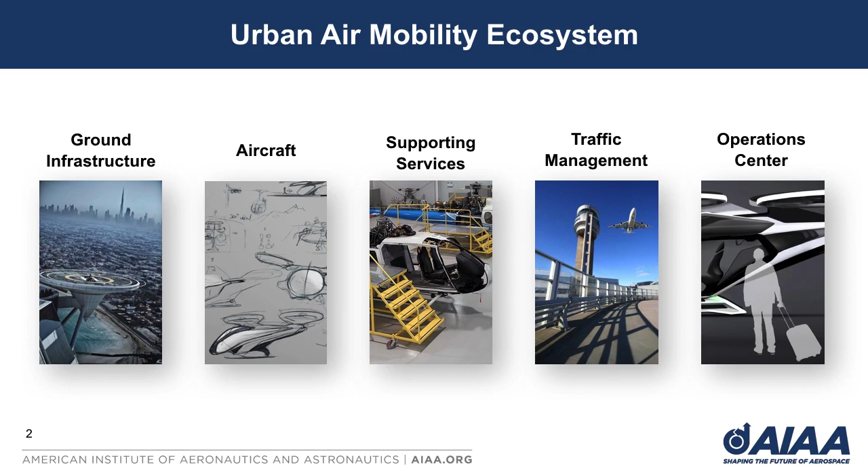The supporting services, which help maintain a high level of vehicle reliability and safety. The traffic management system, responsible for coordinating and enforcing safe airspace usage. And the operations center, responsible for efficient day-to-day operations. We refer to this complex system of systems as the UAM ecosystem. From an engineering perspective, an ecosystem-level view of UAM complicates design significantly.

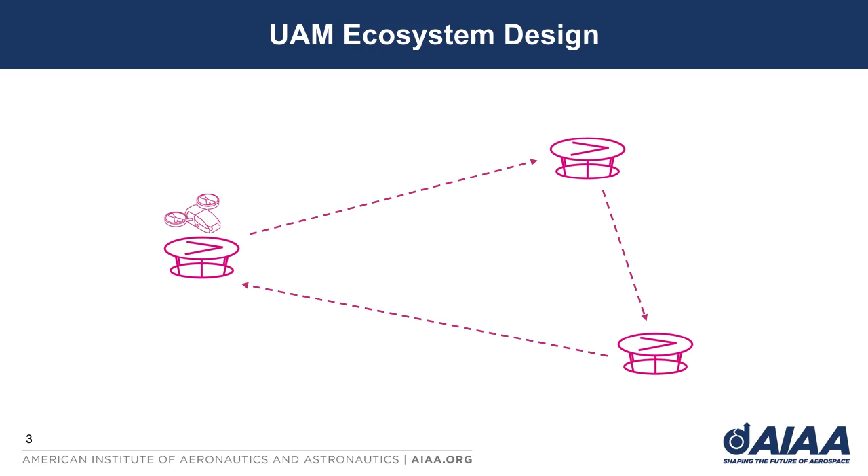Consider this example. Say we have a simple network of vertiports that are connected by a set of routes UAM vehicles can fly. We have a UAM operation that is ready for takeoff. We may have an operations center that manages what the operations in the network do, and maybe even other vehicles in transit. Now, at the time of our operation, which design choices become more important for things to run safely

and efficiently? Is it how the underlying vertiport infrastructure was designed, its location, recharge capability, and capacity? Or is it the fleet management policy that the ops center is following? Or is it some other design choice driving the performance of the system at this stage?

Well, consider this. Both the vertiport infrastructure and the fleet management policy are important for a performant UAM ecosystem. But we must note that designing and building the vertiport infrastructure takes a tremendous amount of time, likely on the order of years. While the fleet management policy, on the other hand, can be changed just prior to takeoff. This is exactly the problem of UAM ecosystem design.

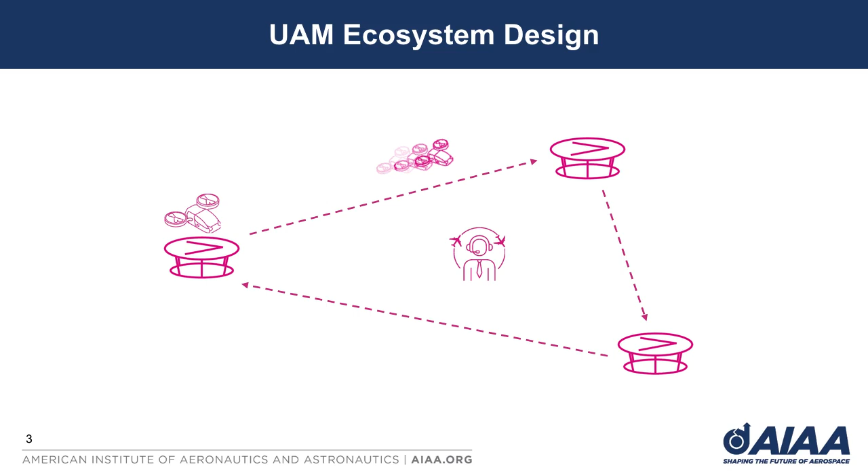We're analyzing and trying to make choices about interconnected systems and design variables that were built on different timescales, interacting with one another. In fact, the performance of such a complex ecosystem can be very difficult to evaluate before it becomes operational. However, in the age of UAM, we have computational tools to answer some of these complex questions. Simulation can help, and we leverage it extensively in this work.

To help us navigate the complex UAM design space, we introduce a simple formalism that helps group different design choices or design variables together. We define three categories of variables that are based on the time horizon between the operational readiness of the ecosystem and when the design decision needs to be made. We call the first category long-term strategic, or simply long-term. The design variables that fall into this category are typically related to infrastructure and UAM network design, vertiport placement, and vertiport constraints. The design variables in this category may need to be chosen years in advance of a UAM operation.

We call the second category short-term strategic, or simply medium-term. The variables in this category are related to UAM route design, vehicle capabilities, and fleet size. Medium-term design variables may need to be chosen months to years in advance. The last category refers to tactical or short-term design variables. It encompasses choices related to fleet management or traffic management and inter-operator coordination. Variables in this category can be chosen hours or even minutes prior to the start of an operation.

It is the choice of all the design variables together that ultimately guide how the UAM ecosystem performs. In this paper, we aim to analyze how the design choices in each of these categories are related to one another, and which are the most critical to a performant system.

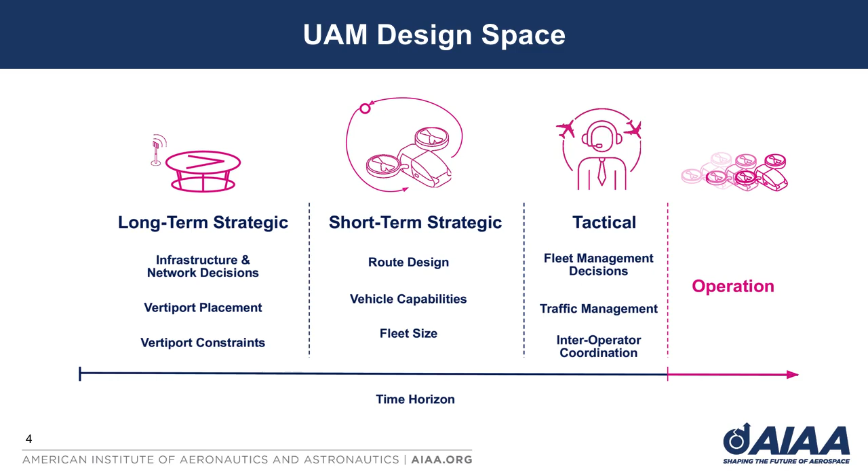Building on this, we highlight two primary objectives for this work. The first is to evaluate the impact of UAM design variables on performance of the UAM ecosystem. Specifically, we use simulation to analyze how design variables from the long-term strategic, short-term strategic, and tactical categories each impact performance metrics like throughput, delay, and utilization. The second objective is to provide ecosystem design guidelines and recommendations. We do this in two ways.

The first is through a structured framework that relates design variables to one another, either through the long, medium, and short-term categories described earlier, or by characterizing simple relationships between design variables as a means of estimating bounds on how they impact system performance. The second way in which we provide guidelines is by leveraging numerical optimization techniques in tandem with simulation to extract design variable sensitivities. This allows us to identify robustness in our design choices and to ultimately extract critical information about regions in design space that are more sensitive or more robust to change.

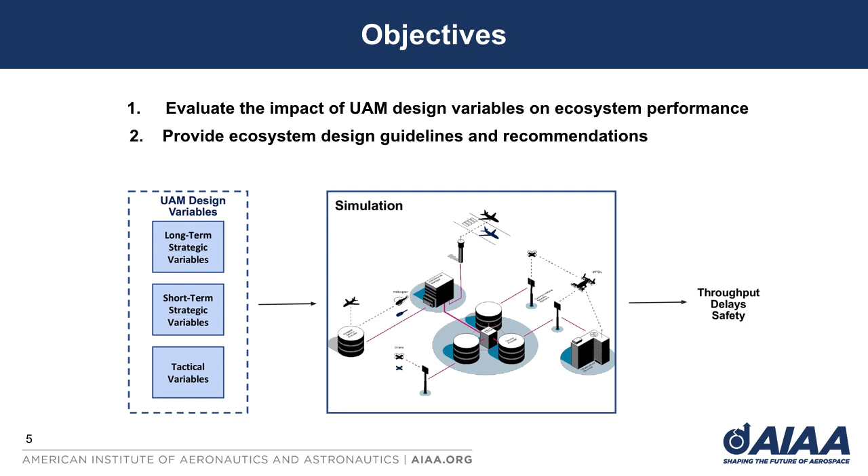I'd like to discuss the exact UAM design variables we analyze in this work. We consider a design variable from each of the long-term, medium-term, and short-term categories. We note that a number of critical UAM design variables are not covered here, and we leave their analysis for future work. In the long-term strategic category, we analyze vertiport capacity.

Specifically, we look at the capacity of a vertiport to accommodate an idling vehicle and to provide necessary maintenance on a flight-by-flight basis, such as battery recharging or swapping. We capture this design variable by a quantity we call normalized vertiport capacity. This value is represented by a ratio of the total vertiport capacity in the ecosystem to the total fleet size.

In the short-term strategic category, we consider the fleet size serving the ecosystem. This is simply the total number of available UAM vehicles that can be utilized during operation. In the tactical category, we look at the fleet management policy used by an operator. Specifically, we consider an on-demand policy which responds to operation requests in real time, an on-demand policy with rebalancing, which additionally rebalances the fleet geographically in order to better accommodate demand.

And lastly, we consider a fixed schedule policy, which uses a pre-computed optimized schedule based on anticipated demand profiles. Each of the policies is implemented algorithmically in this work. We discuss the details of each policy in our paper, but leave those out here in the interest of time.

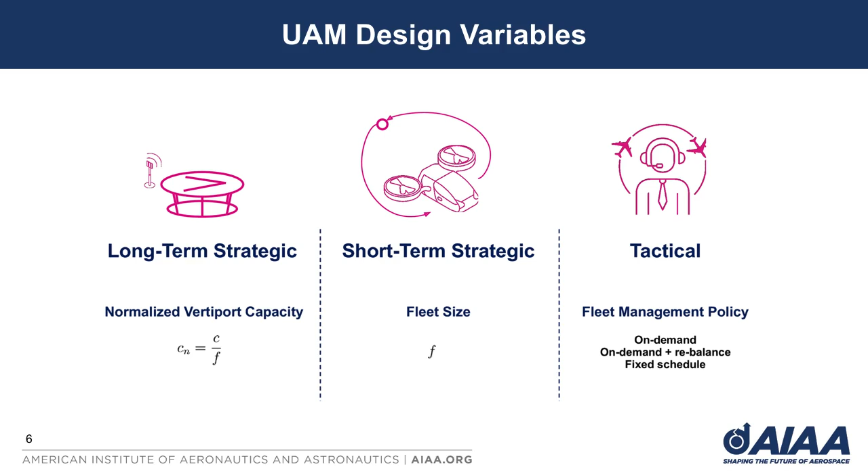Before diving into our experiments, I want to briefly touch on the approach we took in our analyses. Specifically, I want to point out two critical concepts. The first is our simplified surrogate model that estimates demand for a given vertiport and UAM network configuration along with the fleet size serving it. We use the vertiport capacity variable and the UAM network configuration to estimate a rough bound on end-to-end time for an operation. This time spans from operation start to being ready to fly again. We refer to it as T operation.

We combine this variable with the fleet size F to come up with a maximum demand bound the fleet and vertiport network design can accommodate, assuming the fleet is being fully utilized with absolutely no disruptions or wasted time. This bound is denoted by d hat max in our expressions. While it provides only an upper bound, we leverage it in our design and analysis frequently.

This bound can also be considered as a rough estimate of the capacity of a UAM network and fleet in the ecosystem, beyond which the system will have exponential drops in performance. An effective fleet management policy should see maximum operational throughput approach this bound.

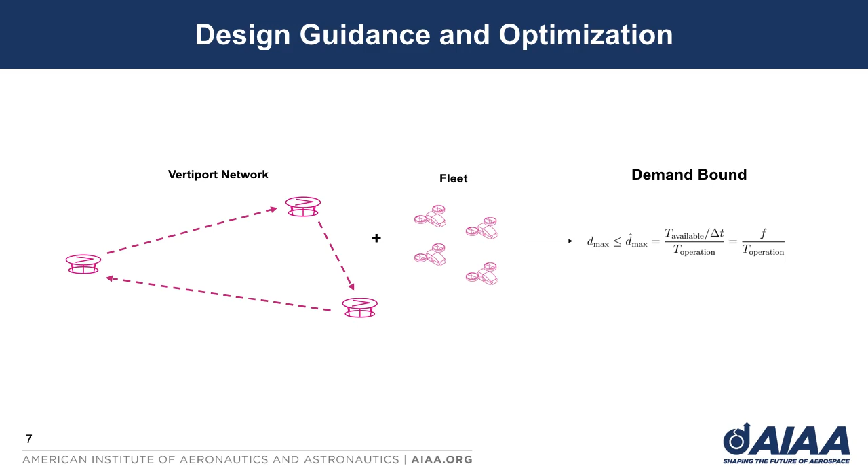The second concept is related to ecosystem optimization. In our analysis, we optimize a cost function J, which is typically a weighted sum of the performance metrics in our ecosystem, such as delay, throughput, and utilization, with respect to three design variables we consider in this work: vertiport capacity Cn, fleet size F, and fleet management policy pi.

Our cost also depends on a number of other properties of the UAM ecosystem, which we consider parameters rather than variables here, such as the vertiport configuration V, the network configuration N, and the demand D. By evaluating this cost function through simulation, we can determine which regions in the design space of our three variables impact ecosystem performance the most. In the next part of the presentation, Sheng will cover our approach to simulation, the results of our work, and the conclusion.

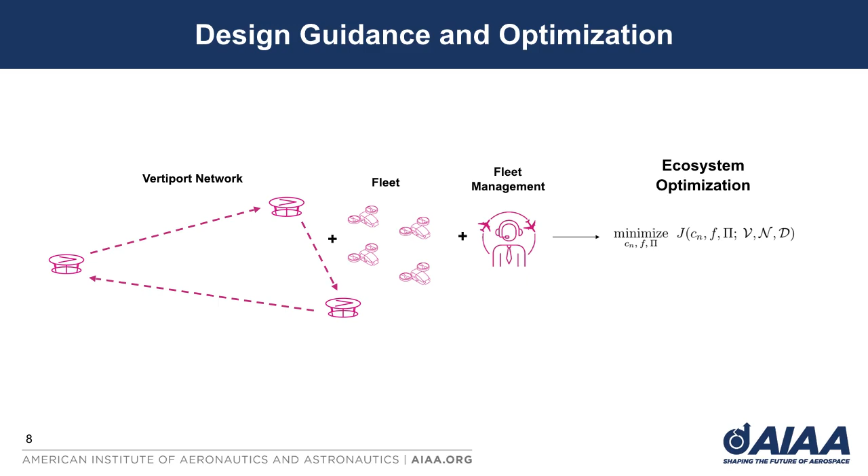Hello everyone, my name is Shane. I'm going to cover simulation modeling, results, and conclusion.

We use an event-driven simulator in this work. This simulator models high-level operational states a vehicle might find itself in under a nominal operational profile such as takeoff, landing, and maintenance. Our simulation doesn't consider the physics model at every time step. Instead, it abstracts the dynamics of each process into time durations, allowing us to efficiently evaluate the impact of UAM ecosystem design variables.

We represent each entity using a probabilistic model known as a Markov process, where each transition between states and the time duration spanning each state are governed by a probabilistic model. Starting from the ready state, an aircraft idles for delta-t idling until receiving an operation request.

An operation request is generated by sampling a random distribution, and it is passed into the model through an operation center. Then the aircraft enters the departure state, holding for delta-t ground holding until a departure fix is available. Then it takes off and flies towards the destination vertiport.

Upon arrival at destination, the aircraft is held airborne for delta-t air holding until a landing space and an approach fix are available, at which point it lands. After spending delta-t turnaround for turnaround procedures, the aircraft will be in the ready state again.

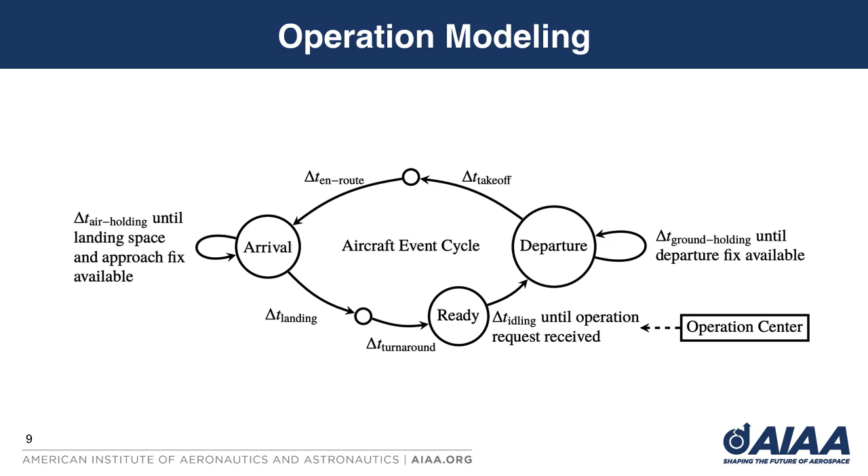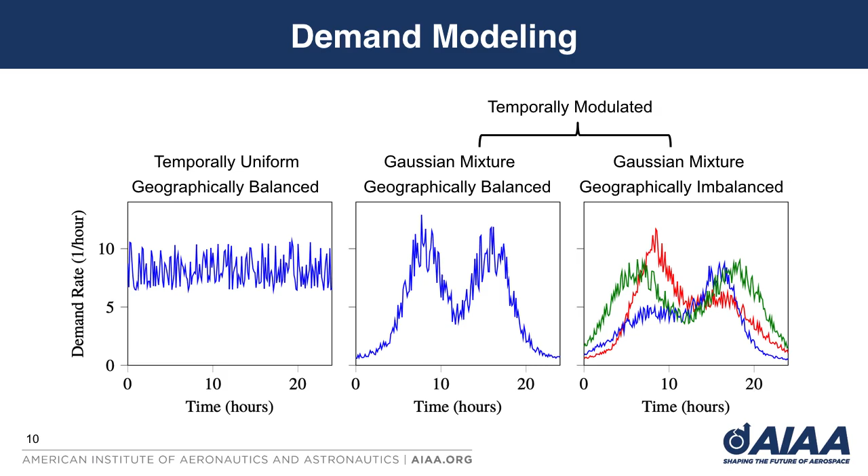A more realistic model uses a time-dependent demand rate. Using a Gaussian mixture model, we can emulate peaks and lows in demand for UAM operations, as shown in the center figure. By shifting the center and height of peaks in a Gaussian mixture, we can create geographically imbalanced demand rates for different vertiports that emulate rush hours to and from city centers. The figure on the right shows an example of such a scenario, where the demand from a specific vertiport is shown in different colors.

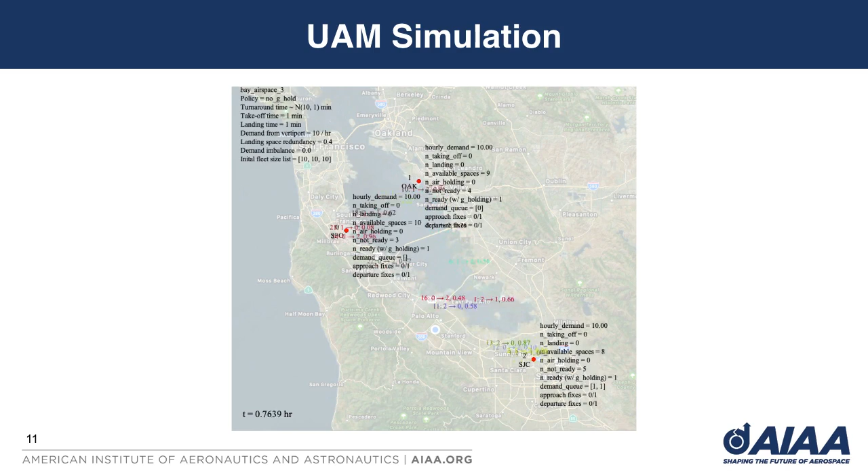Our first analysis examines a UAM network in the San Francisco Bay Area. We assume an aircraft cruise speed of 140 km per hour and the time durations mentioned in the previous slides. We use a fleet size of 36 and analyze how the other two design variables, vertiport capacity and fleet management policy, impact delays and time utilization as we vary demand rates.

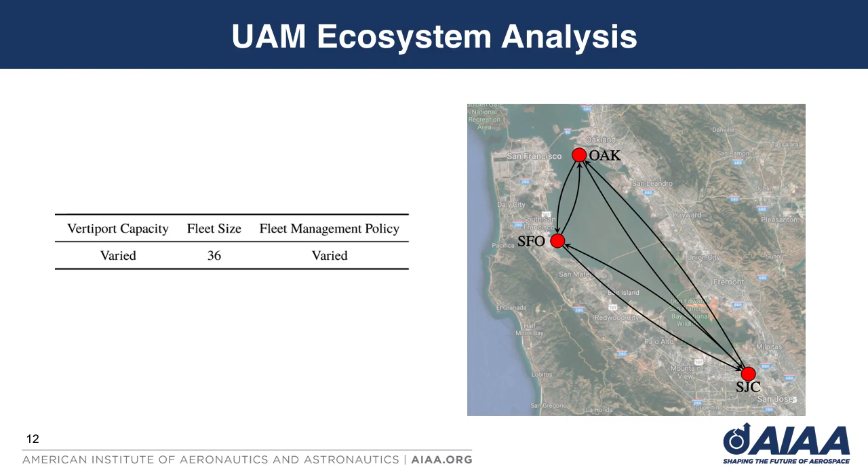Third, we observe an increase in delays at lower demand rates for fixed schedule policies. This occurs due to the sparse nature of operation requests at low rate. This is similar to how one may experience long wait times when waiting for a bus in a rural area, where buses run at low frequencies because of the low demand.

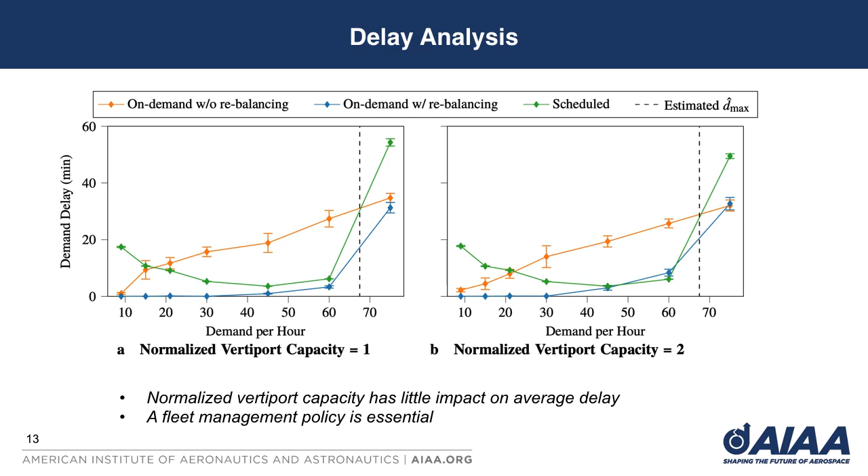Note the location of our estimated maximum demand bound in the figure, which is 67.5 operations per hour, according to the ecosystem configuration. We see delays for all three management policies increase rapidly after demand passes this value.

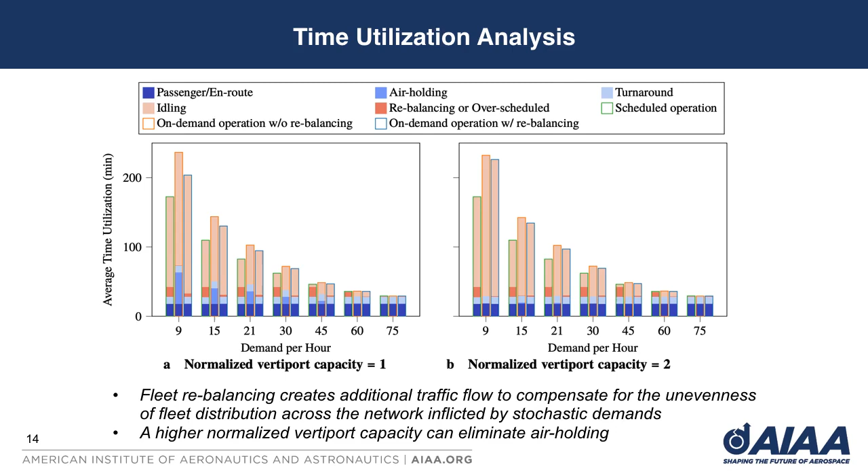to 2 hours. We observe that normalized vertiport capacity has little impact on net average delay and the overall throughput of the system. Additionally, the average throughput begins to flatten beyond around 75 operation requests per hour for all of these fleet management policies, which coincides with the estimated feasible demand capacity bound.

However, the delay performance differs drastically between fleet management policies. Specifically, we observe increasing system-wide delays as the management policy changes from rebalancing to non-rebalancing to scheduled operation. Results of the Gaussian mixture demand model are similar to the results of the uniform demand model. They can be found in our paper.

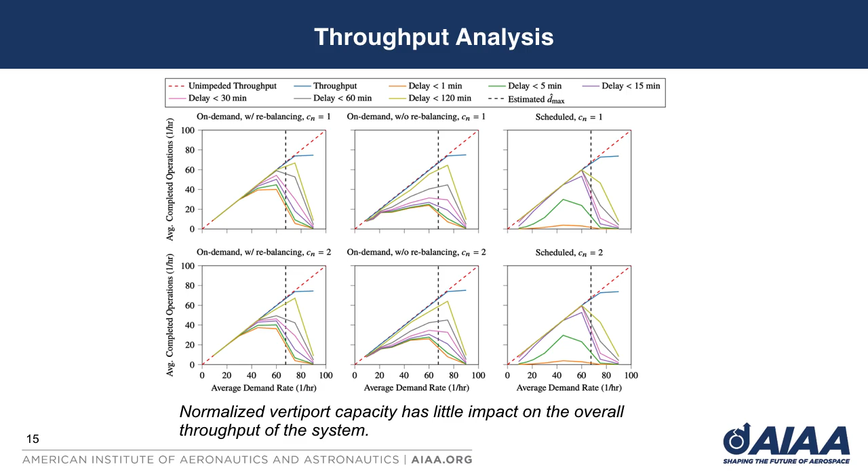We now examine the results of our optimization analysis, which uses the performance cost J introduced earlier. Recall that J is a weighted sum of the performance metrics of our ecosystem. Please refer to our paper for the exact details on how J is formulated. In this analysis, we optimized the cost with respect to a short-term strategic design variable, which is the fleet size F, and a long-term strategic variable, which is the normalized vertiport capacity c_n.

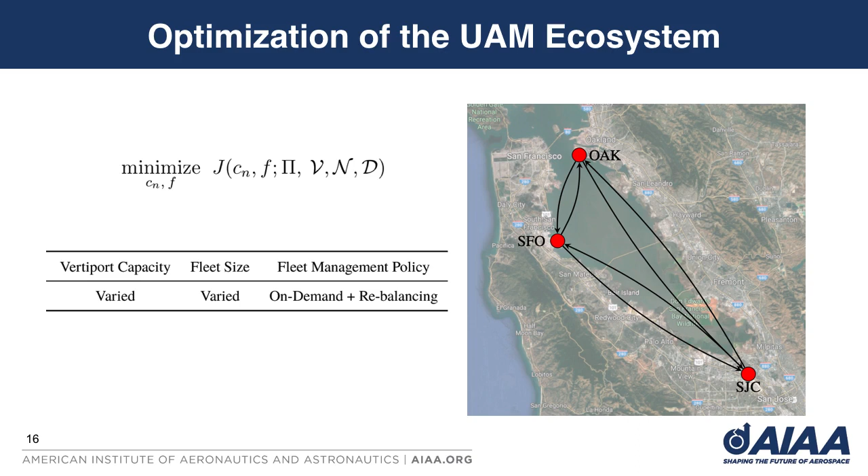The tactical design variable, fleet management policy pi, is fixed to on-demand operation with rebalancing, since through analysis, we have already found that this is the best performing strategy for stochastic demands. We also fixed the UAM network configuration, aircraft speed, turnaround time, landing and takeoff time. We use a Gaussian mixture demand model with peak hours at 8 a.m. and 4 p.m. and a peak rate of 30 operations per hour.

There is a relatively flat zone for cost as fleet size and vertiport capacity exceed sensible threshold levels. This relatively flat landscape in the cost function indicates that once sensible values have been chosen for design variables like vertiport capacity and fleet size, the performance of the UAM ecosystem is mostly impacted by fleet management policy, as pointed out in previous slides.

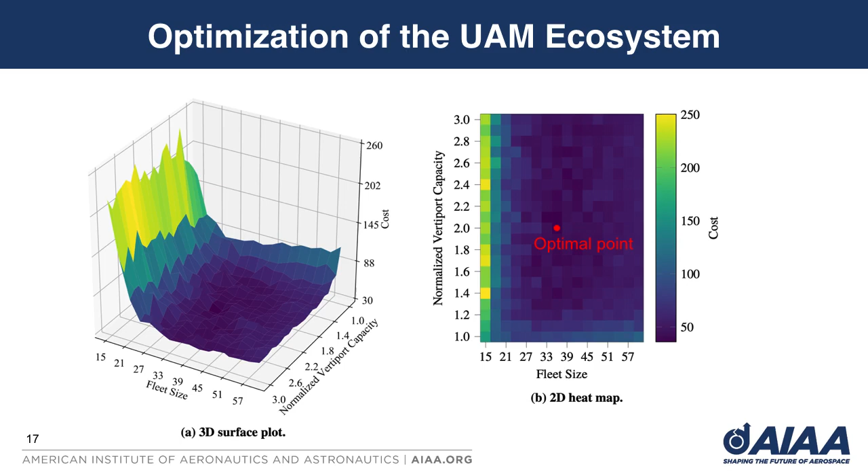The results of sensitivity analysis shed light on how designers of UAM ecosystems can evaluate the risk of a potential wrong decision about a design variable. A design variable that leads to less sensitivity in the cost may need minimal or even no adjustment to move the performance of the ecosystem closer to the optimal point.

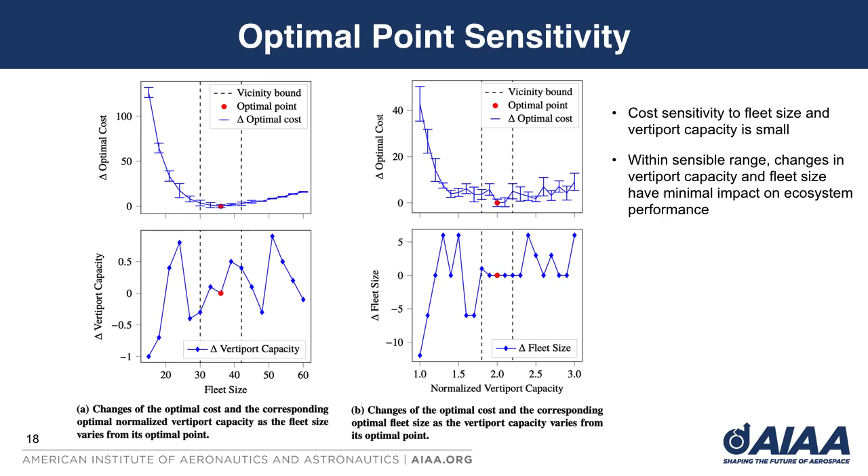As a conclusion, in this work, we examined the performance of a UAM ecosystem operating under a variety of design choices using simulation. We categorized design variables into strategic long-term, strategic short-term, and tactical time horizons. We quantified the impact of various design choices on the UAM ecosystem by evaluating performance metrics such as throughput and delay time.

We show that it is possible to design a high-performing UAM ecosystem even when the UAM network and the fleet serving it have not been optimized for the demand profile that emerges in that ecosystem. Instead, an effective fleet management policy can play a significant role in how the system performs.

For future work, we would like to explore off-nominal operation and systems with disturbances. We want to investigate a wider range of design variables, including geographical locations of vertiports. And last but not least, we want to see the impacts of multiple UAM operators coexisting in a local region.